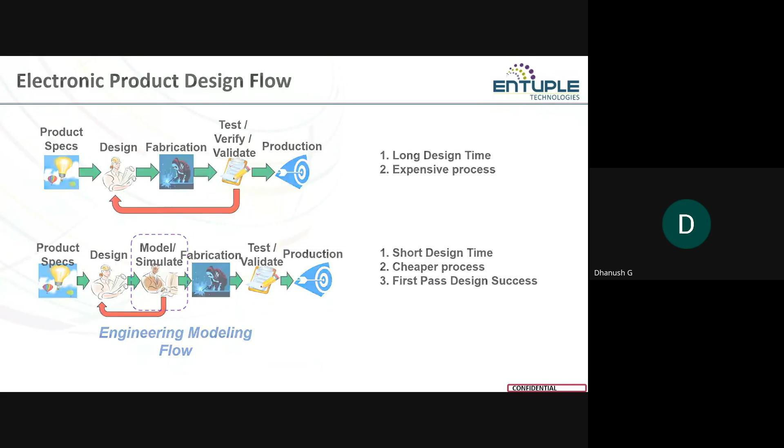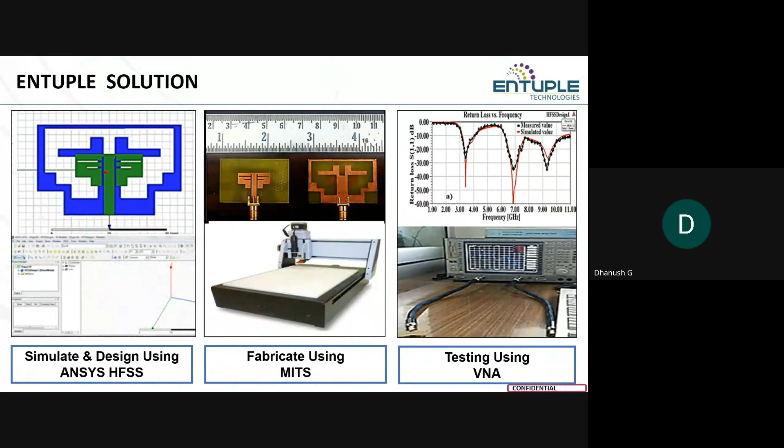Next, this is the ANSYS academic bundle, HF bundle. What are the products available in it, and what are the uses of this? Coming to HFSS, HFSS is nothing but High Frequency Structure Simulator. It's for high frequency electromagnetic simulations, to do a 3D electromagnetic simulation; it's only for high frequency. Next, we have a low frequency application called Maxwell. This is only for low frequency simulations.

Next, we have SIwave. SIwave is nothing but power integrity and signal integrity tools. There we can do power integrity and signal integrity on PCBs. For that, we will be using this SIwave. Next, we have Icepak to do a thermal analysis in PCBs or IC packages or electronic assemblies. When we need to do a thermal analysis, we can use this Icepak.

Next, we have Q3D Extractor. There you can extract RLC values from the PCBs. For those extractions, we'll be using this Q3D Extractor. Next, we have Motor-CAD. That's only for motor simulations. There are so many motor formats available in Motor-CAD. There you can design any BLDC motors and you can check how the windings will be working. For those simulations, you can use this Motor-CAD tool.

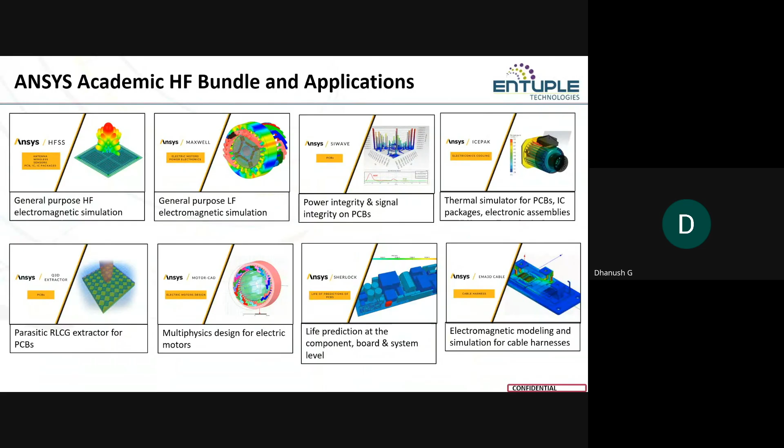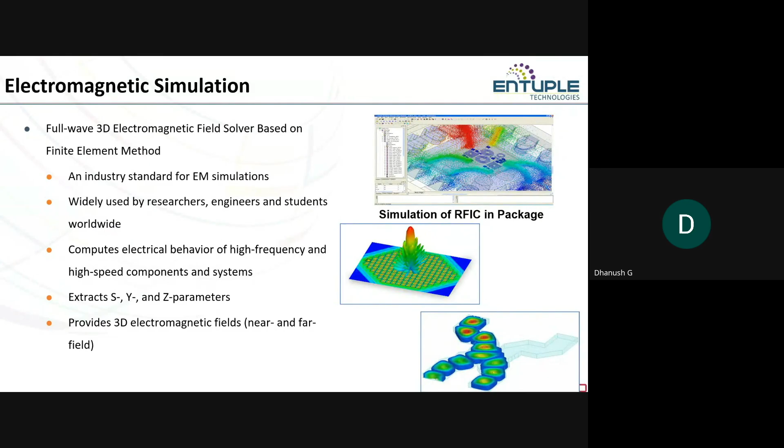Next, I'll be giving an overview of ANSYS HFSS, why we will be using HFSS and what solvers are available in it. HFSS is majorly used to do 3D electromagnetic simulations. It's based on the finite element method. In industry, we use it for EM simulations, and it helps build a bridge between industry and academia. In HFSS, we can extract S, Y, Z parameters, and more like VSWR, and we can extract electromagnetic fields for near field or far field.

These are the different solvers. What we are... any doubts? Okay. No, for sure. Okay.

Next, we have the IE solver, that is integral equation solver. It's based on MoM, method of moments, and its size is 100 lambda. We can use this for very large structures. It's completely frequency domain. We can use IE solvers in automotive industries, or for ships or aircraft to check RF cosite. It's based on MoM.

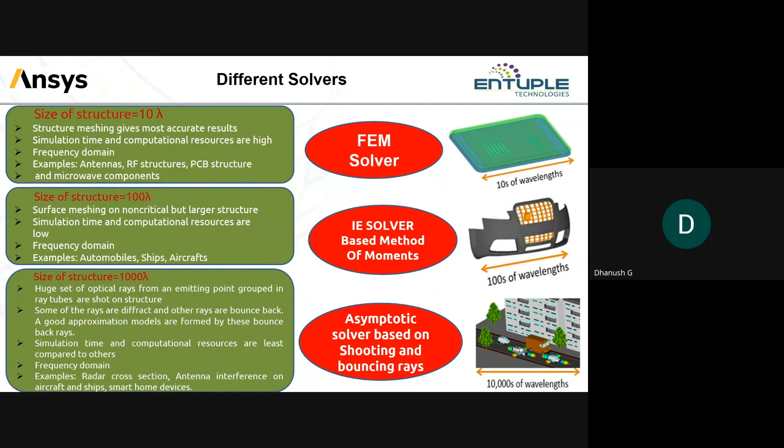Nowadays, ADAS vehicles also use shooting and bouncing rays to check how the antenna behaves inside a car or inside EV vehicles. Next, we have physical optics solvers. It's also frequency domain, and its size is 1000 to 10,000 lambda, because we are using very large structures. That's when you can use physical optics solvers.

Next, we have transient solvers. The transient solver is a time domain solver. If you are doing analysis of a lightning strike over an antenna, you can use transient solvers. You can also use transient solvers to check ESD, electrostatic discharges.

For that purpose, you can also use these transient solvers. These are the important solvers available in ANSYS HFSS.

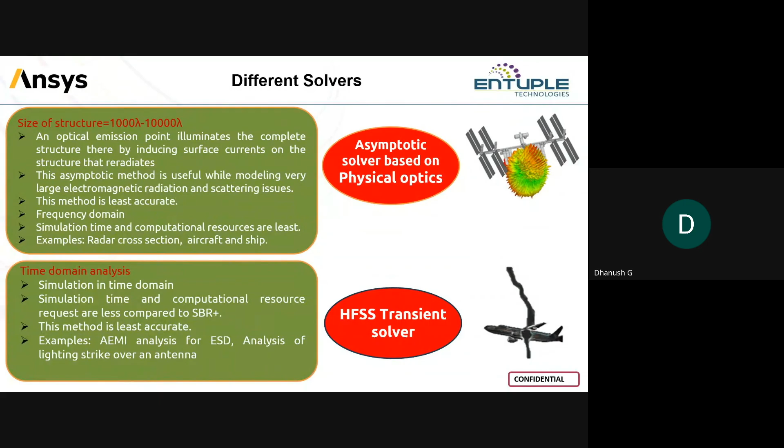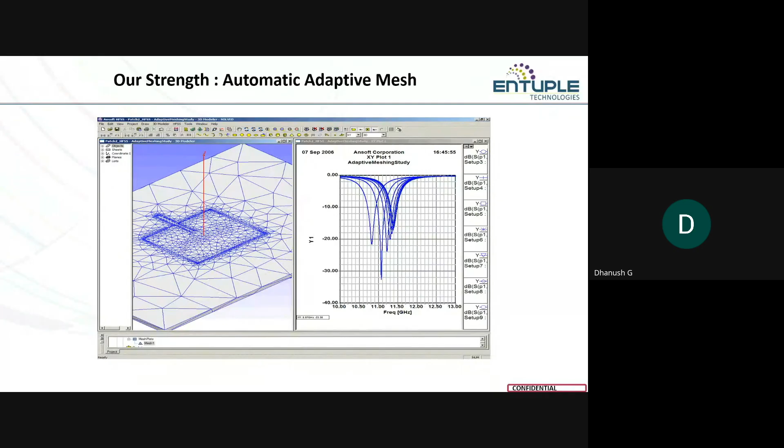Next, automatic adaptive meshing is our strength. Why? Because there's no need to mesh your structure manually. It automatically meshes your structure based on your operating frequency and lambda length, without affecting the fringing field. It subdivides the structure into small tetrahedral shapes to give the most accurate result, without affecting the fringing field.

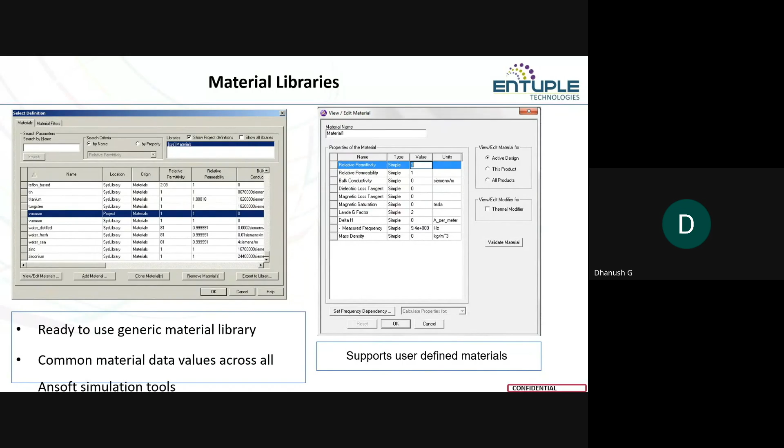Next, we have material libraries. In these libraries, we have so many materials, including FR4, vacuum, and air. All those materials are available. If you want, you can add your own material once you're comfortable with relative permittivity, permeability, bulk conductivity, or dielectric loss tangent. Once you're aware of all these components, you can create your own material and rename it. You can also do a thermal modifier for plasma simulations. For that purpose, you can use this material library and add your own library if it doesn't exist in the ANSYS library. This is the advantage of ANSYS HFSS.

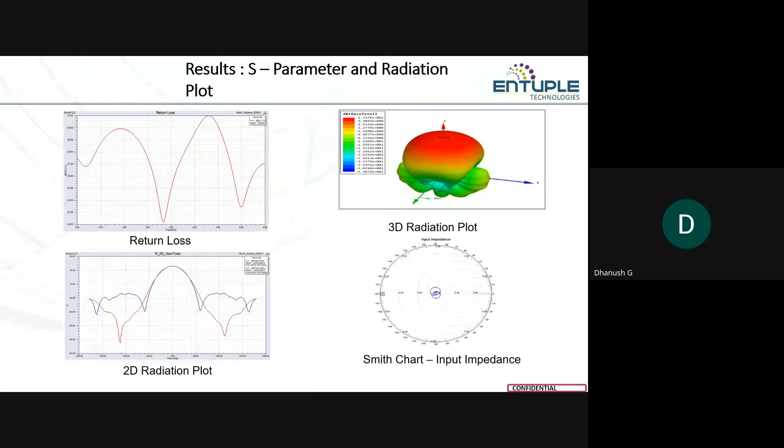In terms of S-parameters, these are the results we can extract in ANSYS HFSS. We can extract the S-parameter, which is nothing but return loss, and we can extract 3D radiation plots, 2D radiation plots, and Smith charts. You can do an equivalent circuit using the Smith chart. I'll be showcasing in the next slides how we can create an equivalent circuit using the Smith chart. These are the results we can extract, but these are the main ones we'll be concentrating on.

Next, there is an antenna toolkit available in ANSYS. In this toolkit, there are so many inbuilt examples. Using these examples, you can change the operating frequency and the outer boundary, and it automatically creates the structure based on your operating frequency. So you can save your time in designing step by step. You just enter the operating frequency and the radiation boundary required.

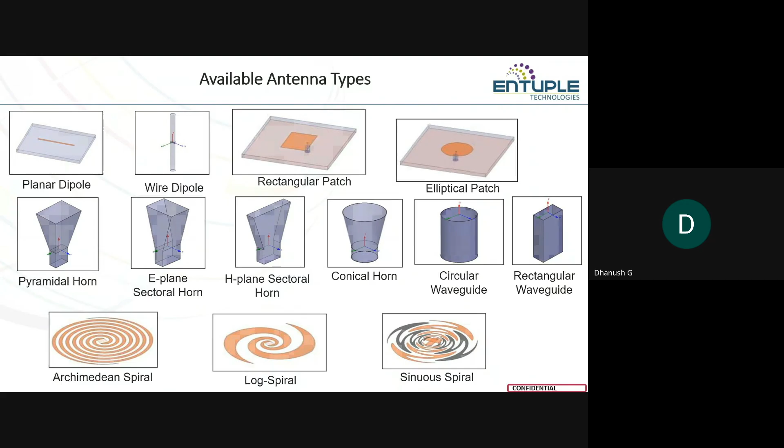Next, these are the available antenna types inside the toolkit. We have planar antennas, wire dipole antennas, E-plane and H-plane antennas, horn antennas - everything is available. We also have bow tie antennas, log periodic antennas, and PIFA antennas, and many more antennas inbuilt here. You can just enter the operating frequency and utilize this.

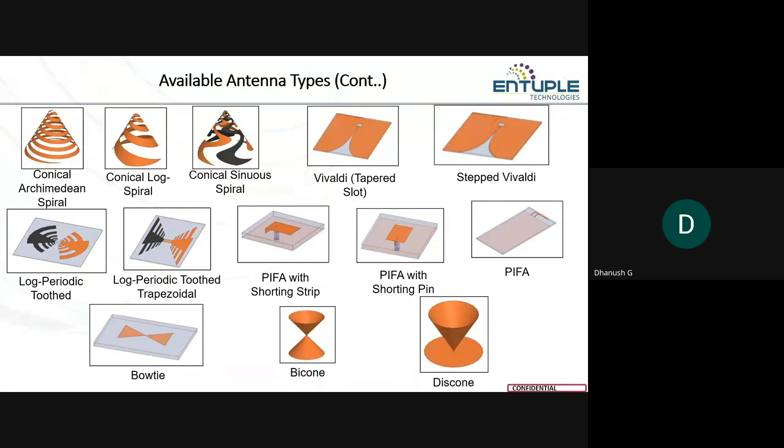For doing antenna simulations, you can use this. For antenna array simulations, you can use the HFSS surfaces to do 4 by 4 arrays, 16 by 16, or 32 by 32 arrays, or a unit cell approach using periodic boundaries. For those simulations, you can use these surfaces.

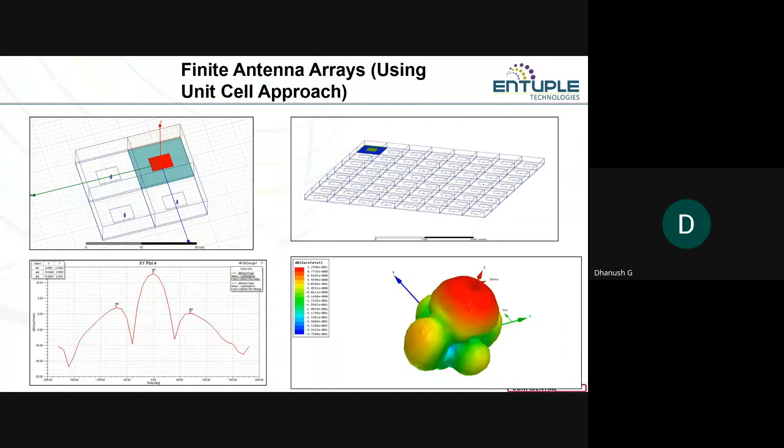Next, coming to ANSYS Maxwell, there you can do low frequency simulations. You can solve both frequency domain and time domain for low frequency applications, to design motors or transformers. For those things, you can use ANSYS Maxwell.

These are Maxwell's applications - what you can do using Maxwell. You can do BMS battery management system design software, use it for power electronics, and wireless charging simulations - this is a wireless charging simulation. For those simulations also, you can use ANSYS Maxwell, as well as for rotating machinery optimization. All those things you can do in ANSYS Maxwell.

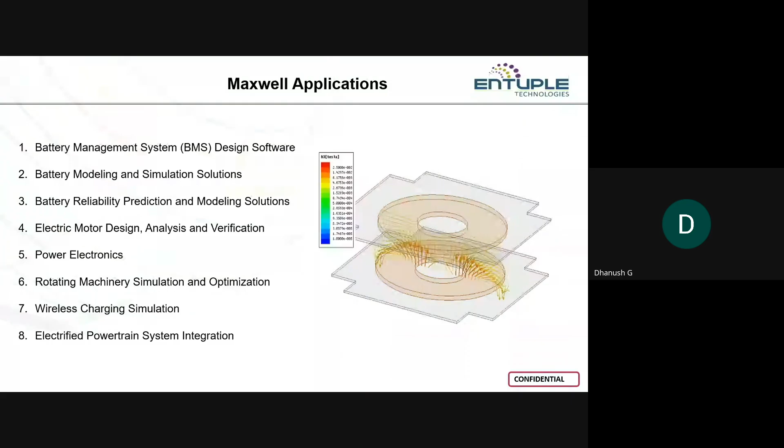Next, we have ANSYS Designer. There you can do circuit simulations, system simulators, Smith tool, and estimation tools. In this circuit simulator, you can do DC analysis, transient analysis, harmonic balance, and small signal analysis. Coming to system simulators, you can do frequency domain and time domain analysis. Next, coming to planar EM, there you can do interactive MOM solvers and see how it works with parametric capabilities.

Next, coming to Smith tool. In this Smith tool, you can create equivalent circuits. For example, you can carry your antenna and add resistors or diodes to it. Then you can take it to the Smith tool and get results, and using that Smith tool, you can create equivalent circuits.

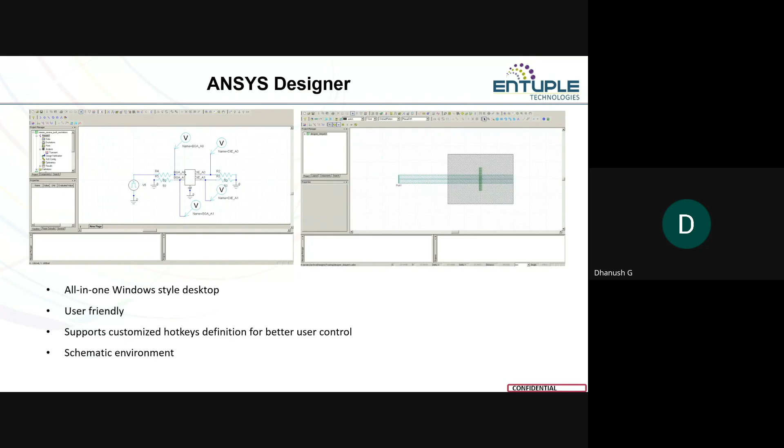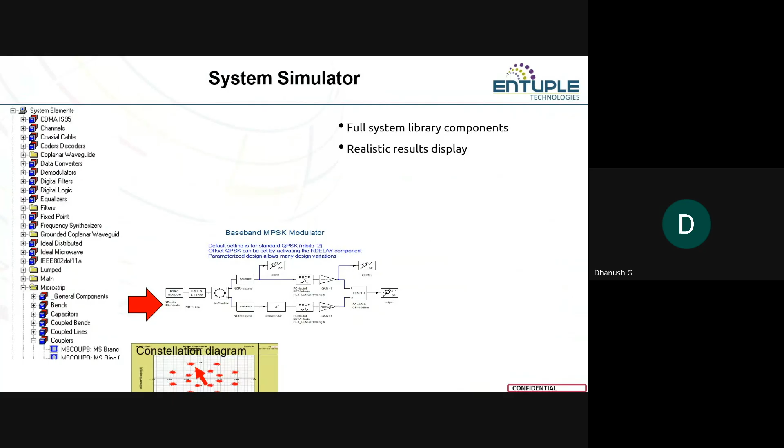This is the GUI of ANSYS Designer, an all-in-one Windows style desktop, and it's very user friendly. This is a circuit simulator. If you want any components like filters or coaxial cables, you can just drag and drop them to the workspace and see the components there. For that purpose, this is very user friendly. Coming to system simulators, these are the results you can extract, like constellation diagram, histogram, and transient plot. The eye diagram also you can see using the system simulator in the Designer part.

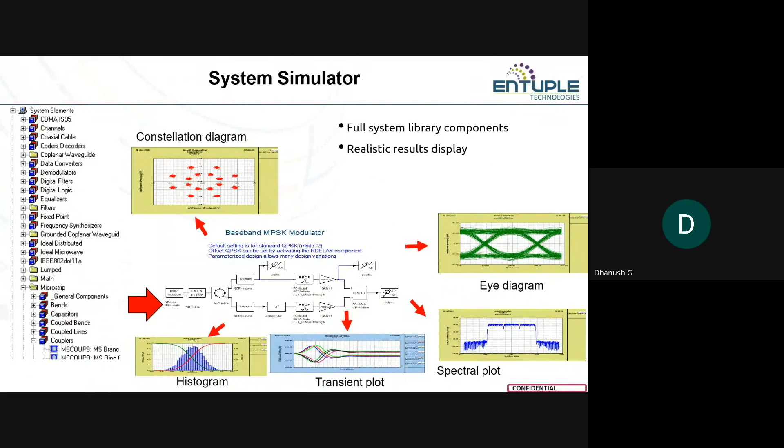Next, we have planar EM. In this, you can see all the results for your antenna structure.

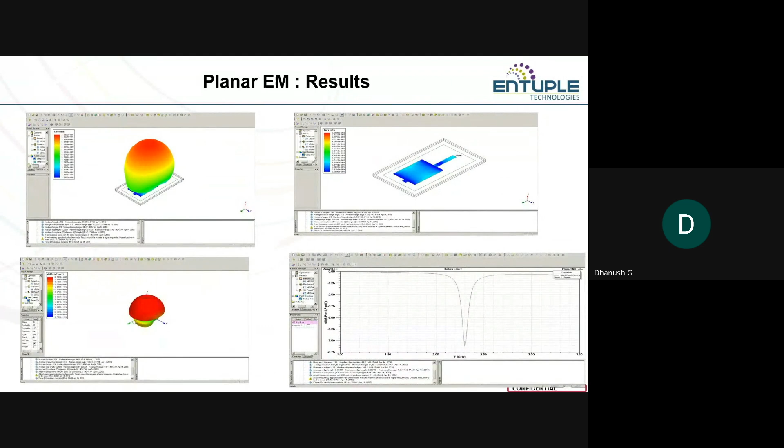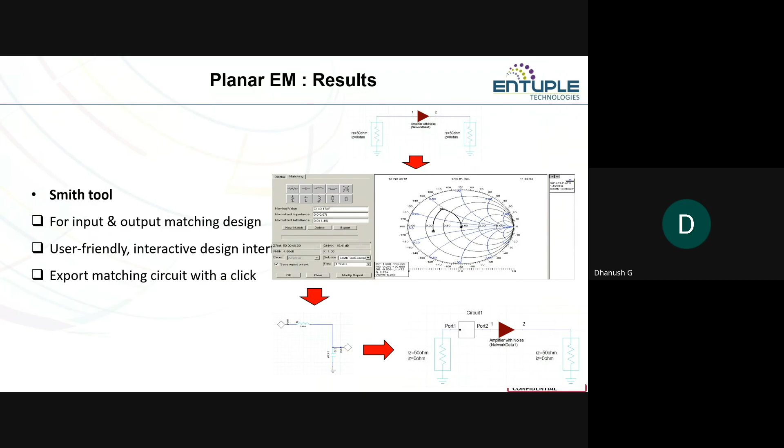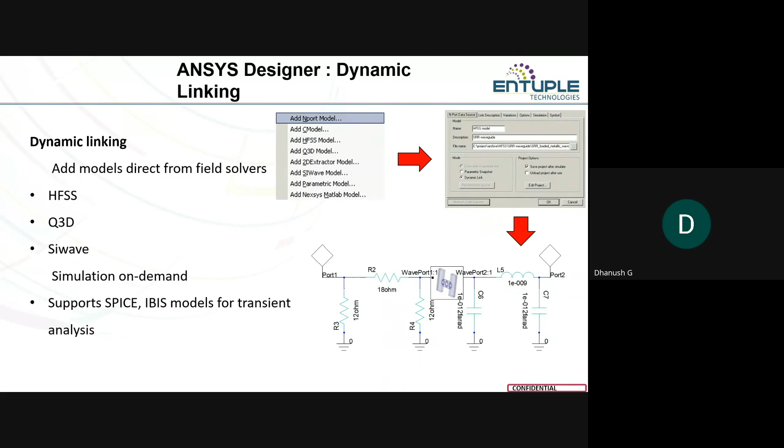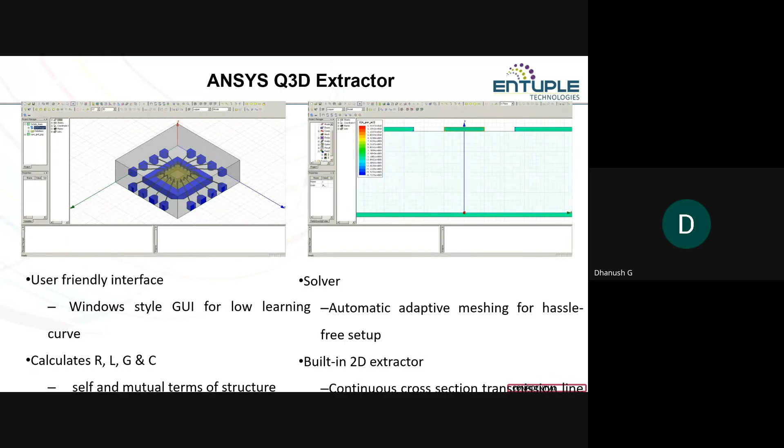Next, coming to Q3D extractor, there you can extract RLC circuits using a PCB structure, and it's a built-in 2D extractor. It's very user friendly there. For extracting purposes, you can use this Q3D extractor tool. These are the features of this Q3D extractor. You can have matrix results also displayed in it, and data table plots can be exported to any file formats, and you can export the entire circuit model for circuit analysis. These are the features of this Q3D extractor.

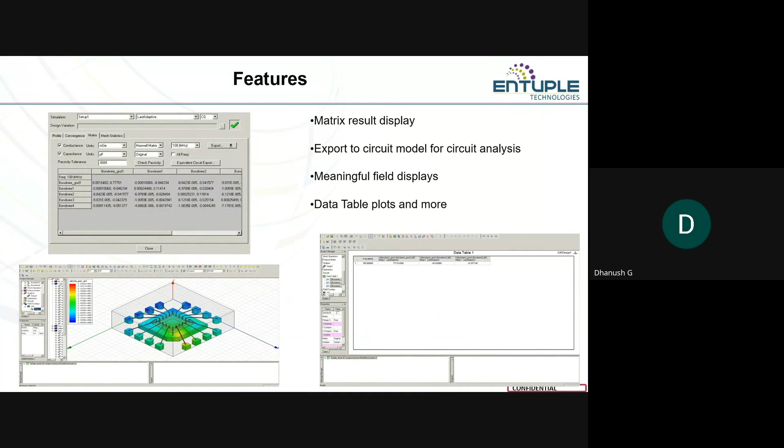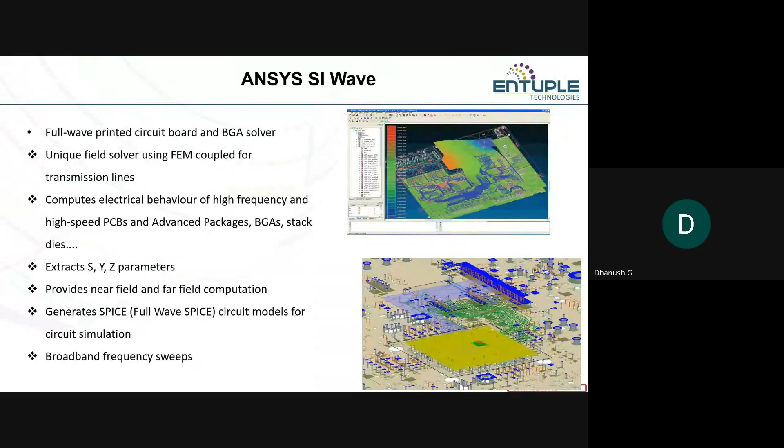Next, coming to ANSYS SIwave, it's a signal integrity tool. There also you can extract S-parameters. If you want to do PCB analysis or IC packaging, or generate SPICE designs and circuit models, and if you want to do broadband frequency sweeps, for that purpose you can use ANSYS SIwave to do FEM coupled analysis for transmission lines. All those things you can use this ANSYS SIwave for.

The applications where we can use this SIwave include PCB board modeling and simulation. For that purpose, we can use SIwave to check the reliability. And coming to electromagnetic interference and compatibility, that is a mandatory test for EV vehicles nowadays. For that purpose also you can use this, in EMI/EMC applications.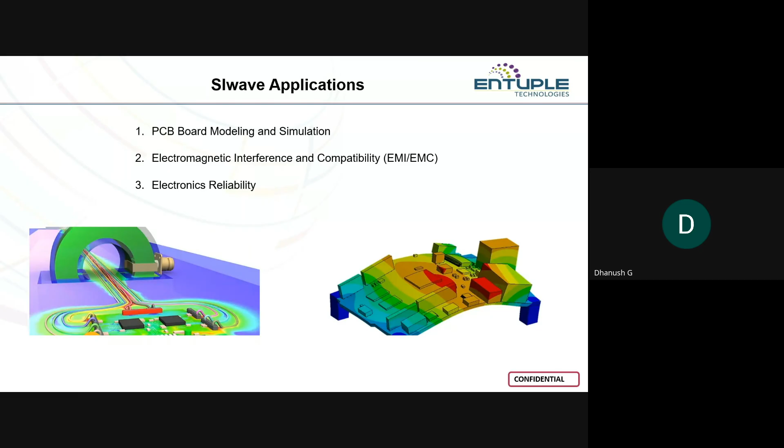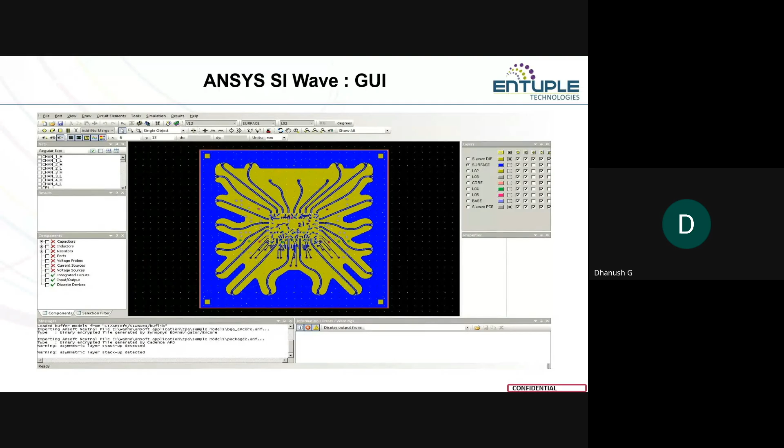Next, this is the GUI of ANSYS SIwave. There we have an electrical property calculator. You can calculate all the components like resistor or inductor properties. All those things you can calculate in a single click. So that's the advantage of ANSYS SIwave.

And this is all about ANSYS. We are there for accuracy, capacity, and speed.

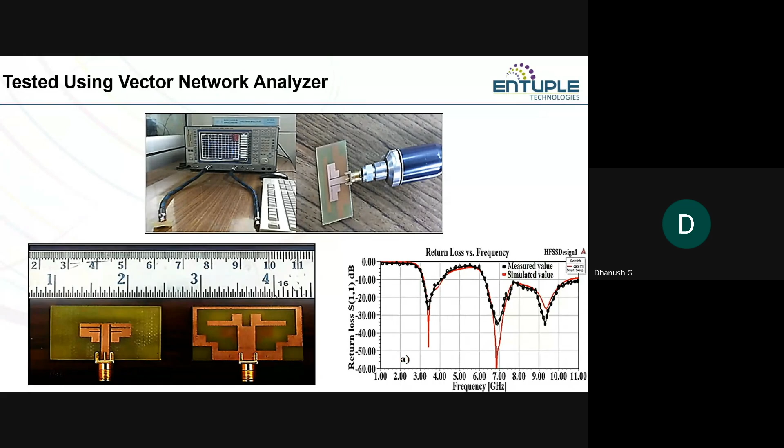If you have any doubts, please let me know here. Otherwise, I'll be going with the next part.

Sir, one question is there in the chat box: what is the cost of Auto Lab machines and MITS machines? Sir, I'll be giving my mail ID, sir. There we'll discuss one on one. I'll be putting my mail ID and contact number in the chat box, then we'll discuss one on one on the price and cost wise.

Sir, there is one more query in the chat box: what models are used in engineering modeling flows? Like what does model mean, can you brief about it, sir? Whether it's for turbulence model or CFD modeling, just give more introduction about it, then I can address it.

Before fabrication, in the block diagram... Sir, I didn't get your question, sir. Can you unmute and ask your question? Hello sir, am I audible? Yes sir, yes sir, yes sir.

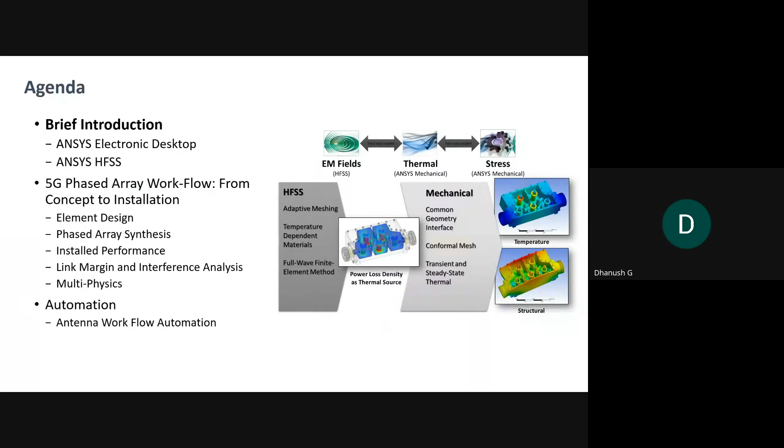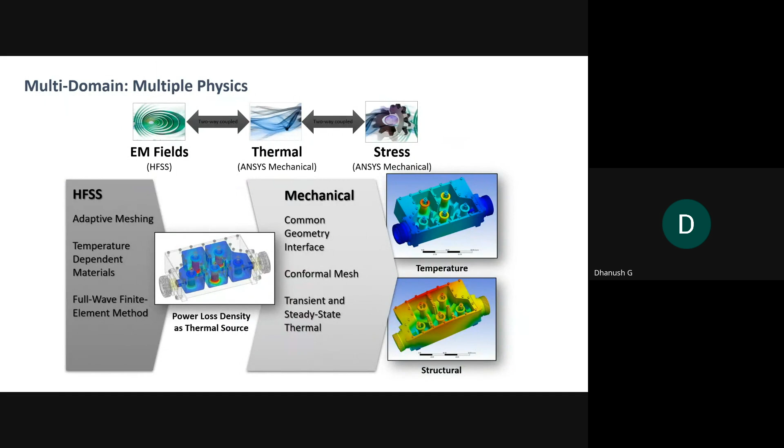In EM fields, we will be using ANSYS HFSS. In ANSYS HFSS, we do simulations with adaptive meshing and temperature-dependent materials. Coming to Mechanical, there you can do conformal mesh and use transient and steady-state thermal simulations. There you can check the heat transfer or the deformation. All those things you can check in the Mechanical tool.

Next, this is the GUI of ANSYS HFSS. In the next slides, I'll be explaining all these icons. And you can have it all in a single GUI in a single window. You can visualize all the capabilities in ANSYS Electronics Desktop.

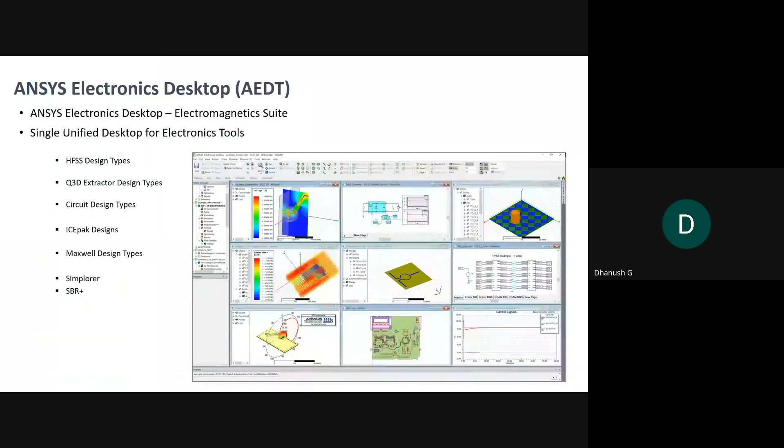Next, these are the steps of the electromagnetic simulation workflow in ANSYS HFSS. First, we'll be creating a model. In the model, we'll be creating structures like a microstrip patch or anything else. Next, coming to boundaries, there you can assign perfect electric boundaries or all those boundaries. Next, in the excitation part, you can give a port, or give a current for your antenna source.

And coming to mesh operation, it's default meshing automatically, but you can also mesh manually, that option is also available. Based on length, you can do meshing. Next, coming to analysis, you can assign operating frequencies and the sweep and maximum delta values. Next, coming to Optimetrics, there you can do optimization for your antenna, for specified frequencies or specified length and width.

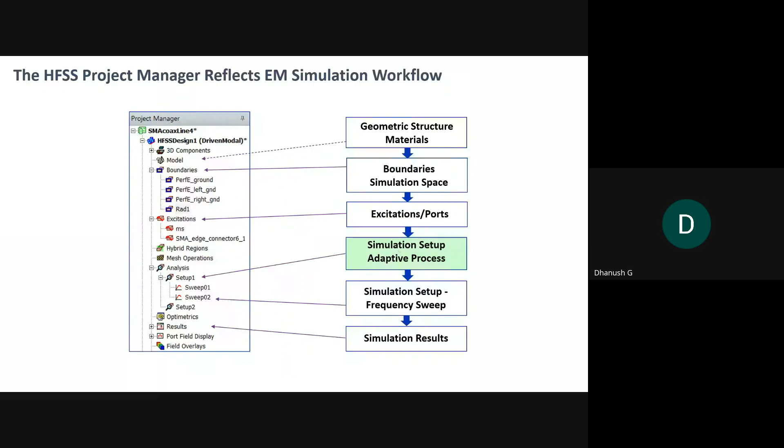Next, coming to results, that is post-processing. There you can see results like VSWR and all those things. Next, coming to field overlays, there you can check how the electromagnetic distribution happens for a structure, and you can visualize it animated.

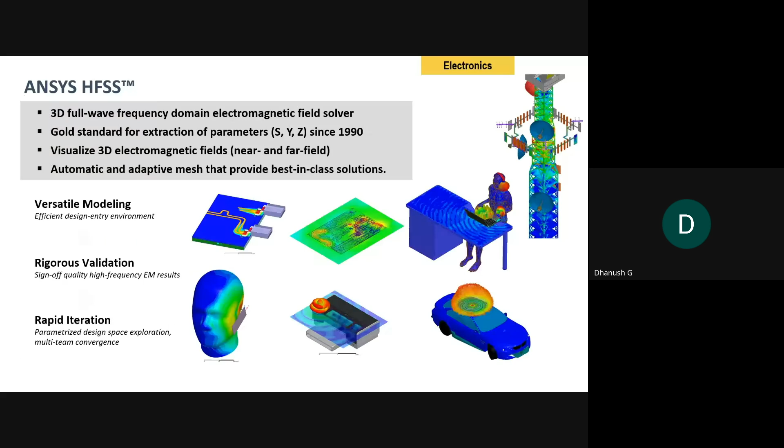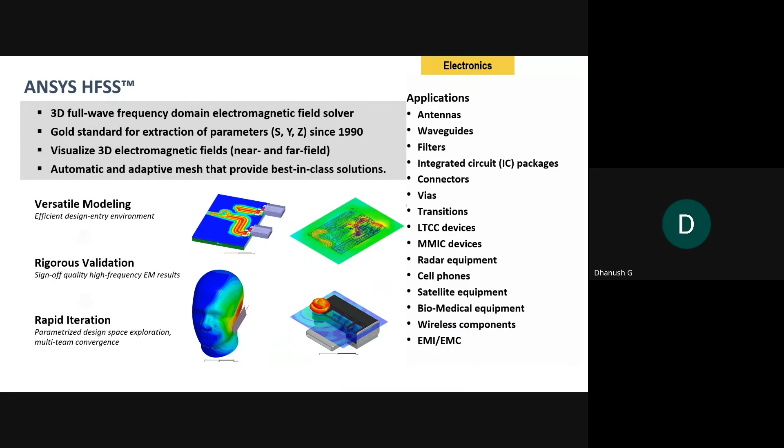These are the applications where we can use ANSYS HFSS. You can use this for antennas, waveguides, filters, vias, MMIC devices, cell phones, biomedical applications, or EMI/EMC applications using some set of standards. These are the applications we can design using ANSYS HFSS. You can do SAR rating also.

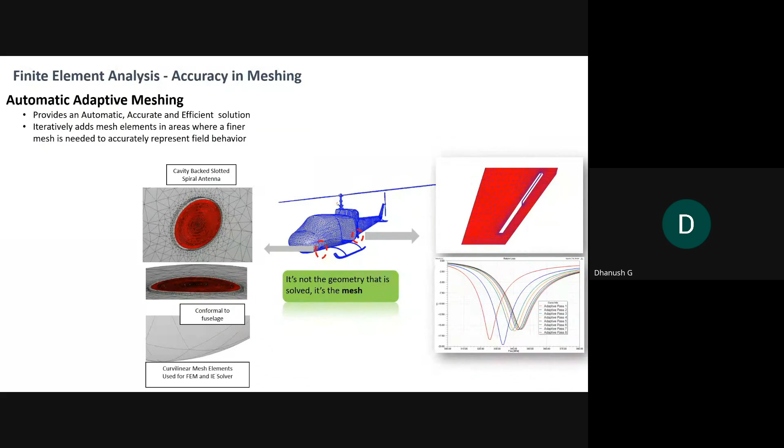For that purpose, automatic adaptive meshing is also important. There you can get accurate results. For that analysis, finite element analysis is used in the meshing part, and it will be divided into tetrahedral shapes. This is the adaptive meshing process, how the process is taken care of inside ANSYS HFSS.

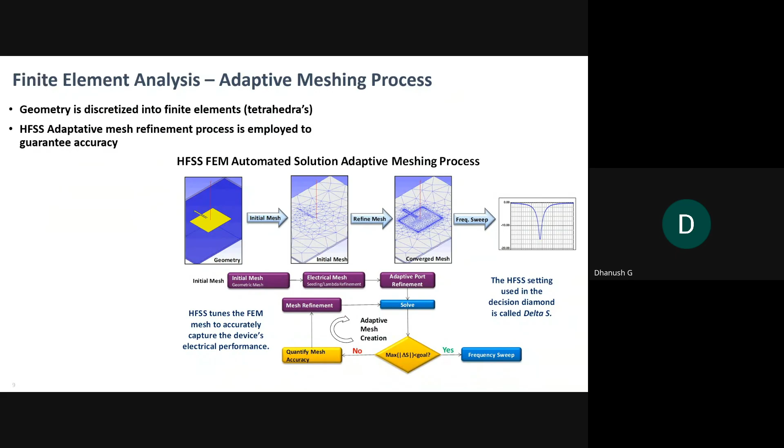First, we create a geometry. Next, it creates an initial mesh, refines the mesh, and converges the mesh. Next, it generates the frequency sweeps. If there is an error, it repeats the process, mesh refinement and solve, and edits the maximum delta values and frequency sweeps. These are the background processes in adaptive meshing using finite element analysis in ANSYS HFSS.

And next, I'll be showing concept to installation using ANSYS HFSS. In this, we are there for all major physics from chips to ships.

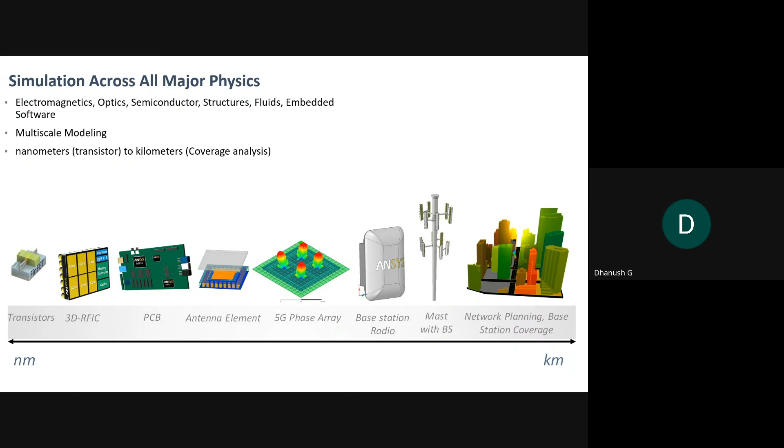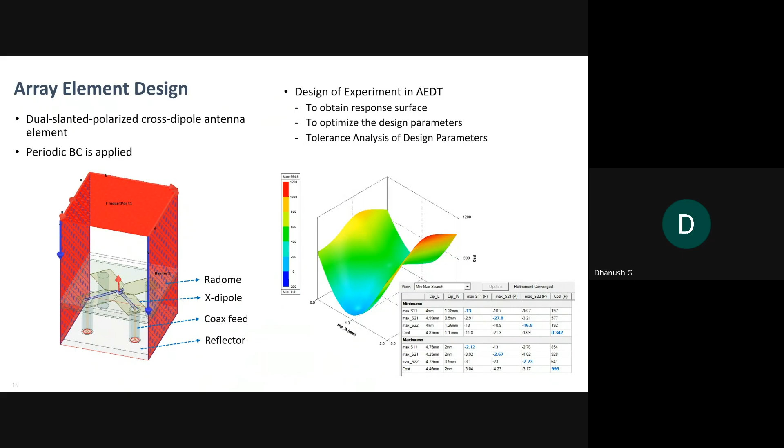These are array element designs. This is for dipole antennas. This is the antenna we are using for the creation of 5G phased arrays. For that purpose, we'll be using dipole antenna and cross dipole antenna elements. Periodic boundaries are applied for this, and we'll make this an array. These are the new features available in ANSYS HFSS to make this an 8 by 8 array for 5G at a 28 gigahertz operating frequency.

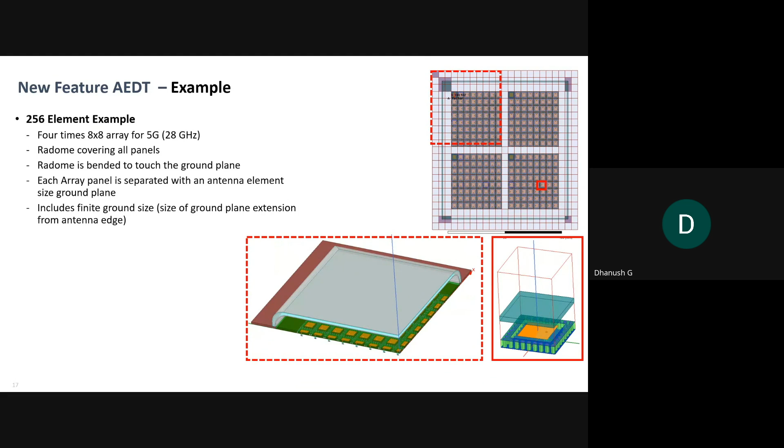Then, without housing, how it will radiate, all those things we can check using ANSYS HFSS. And after covering with a radome, how all the panels will be working, how the radiation will be split, all those things you can visualize using ANSYS HFSS. These are the new features available in ANSYS HFSS, how the simulations are taken care of and how much time a simulation will take.

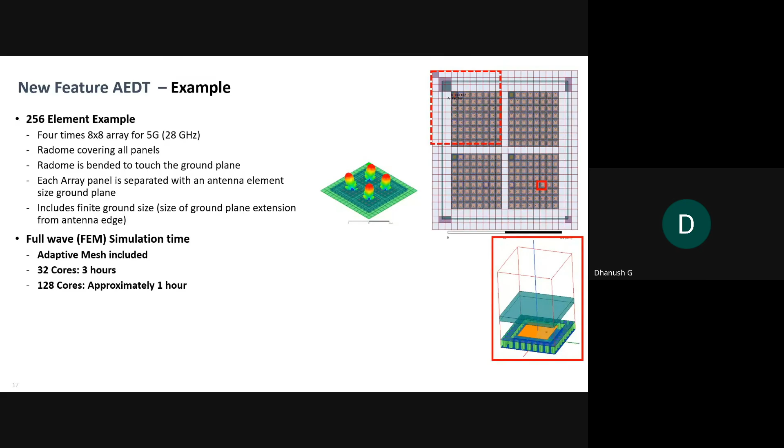With 32 cores, it will take approximately 3 hours to run all these simulations. For example, to install on the base station, how the radiation will happen, all those simulations you can do in 3 hours. And with 128 cores, it takes approximately 1 hour to do all those simulations. These cores are based on your system configuration.

Next, coming to antenna housing and installing the phased arrays including housing on the mast. For this process you can use all the available products in ANSYS Electronics Desktop. We can't design everything using ANSYS HFSS itself to create this entire area. We will be using the mechanical or structural tools to create all these building blocks or blockages, along with other ANSYS multiphysics tools. There you can create all those building blocks. We'll be placing an antenna, we'll be placing a mast. For those, you can use different physics tools.

Next, coming to hybrid solutions, where the finite element method is applied to antenna array structures, how the solution will combine both solvers in one design, and how it will solve the complex problem with fully coupled solutions. All those things you can do in this part.

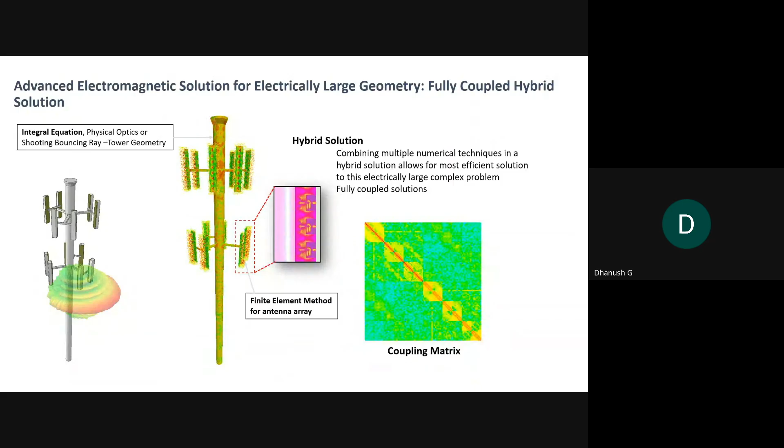Next, after installing the antennas in a mast, how the 5G base station radiation will be happening and how the 4G base station results will be. In the 5G base station, we receive fewer side lobes and more major lobes. Coming to the 4G base station, we are getting many more side lobes and far fewer major

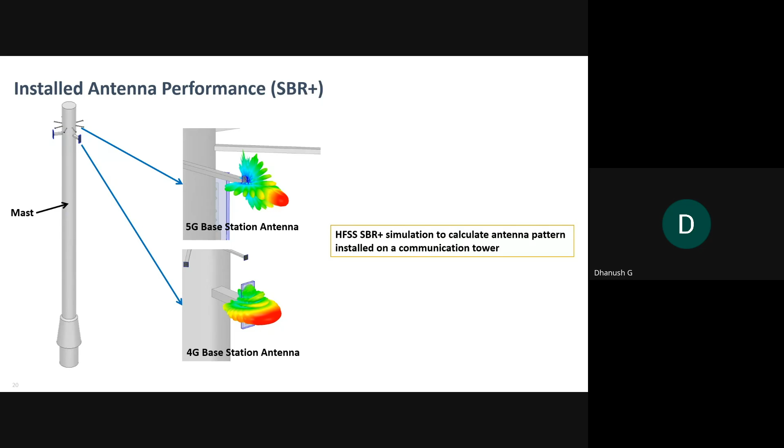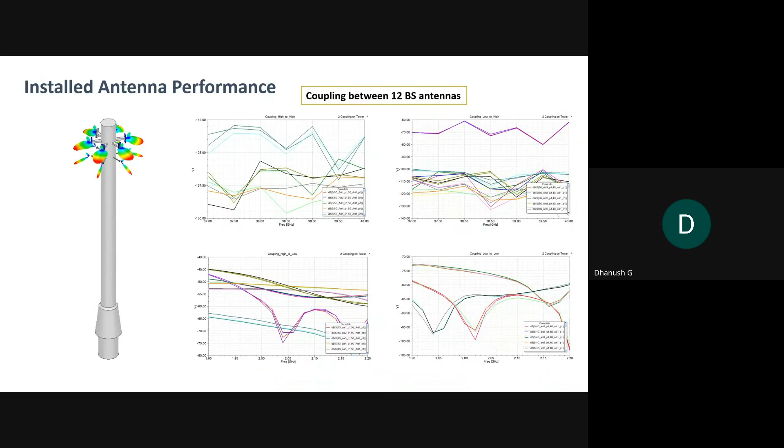lobes. With a 5G network, how the antennas will beam steer, how the antenna arrays will be, how the housing will be covering, all those things matter to get a proper, accurate radiation in a mast. And these are the results of after-installed performance in a mast, and how you can extract results from all antennas, how each particular antenna will be working. All those results you can extract after installing in the mast.

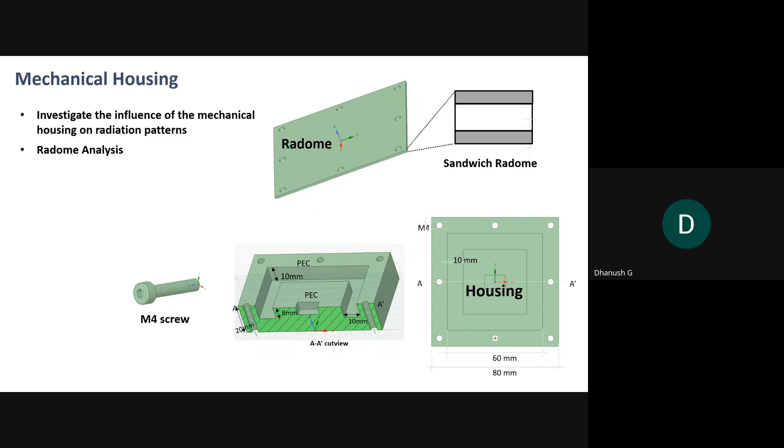Next, coming to mechanical housing, this is the housing we are using, how we created the housing, what are the screw length and weight. We have the entire specification to create this housing, and how the round corner radome will be affected and what results will change using those round corner radomes.

Next, how the edge effect matters for this housing part, how the smooth and the sharp edge will be affected. The black one indicates the smooth edge and the red one indicates the sharp edge. This also makes a big difference in the radiation patterns. Once we come to the housing or simulation part in hands-on, if it's possible, I'll be showcasing how it affects an antenna structure.

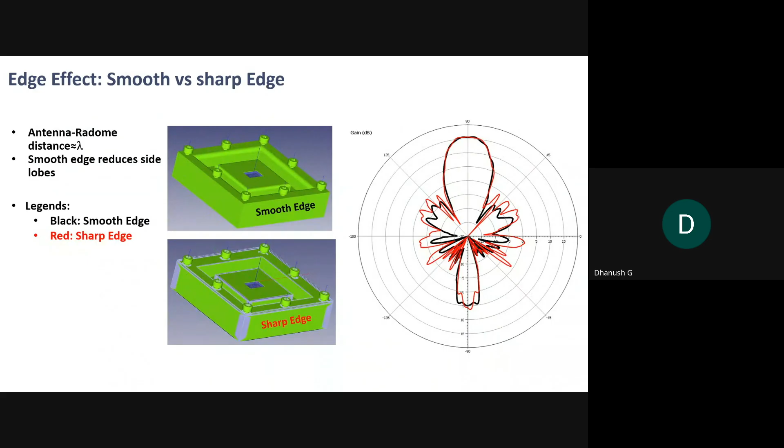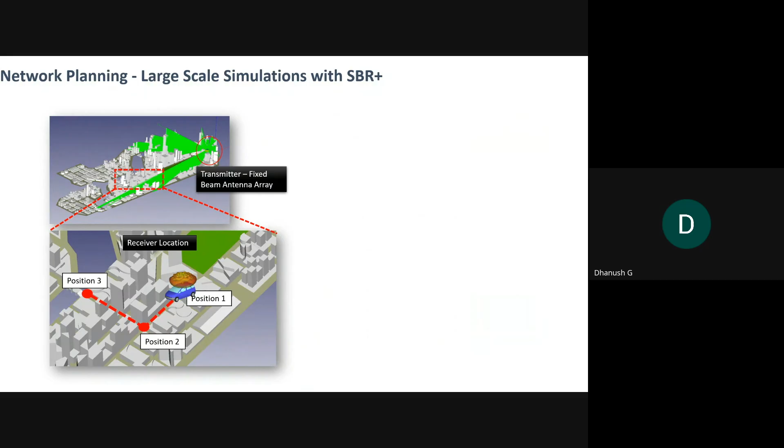Next, coming to network planning for user interfaces, how the handoff will take place and how the MIMO will be working there. All those things you can do in network planning and coverage studies. For example, if you want to see network planning at a large scale in simulation, you can use these SBR solvers. For example, a receiver will be traveling from position 1 to position 2 to position 3. We have a base station in a constant position. How the network will fluctuate and how we get network loss, all those simulations you can observe in these position 1 to position 3 results.

How the signal strength is reduced for a receiver traveling from different directions with more blockages, how the network drop will be happening, all those simulations you can do in HFSS with the support of SBR solvers. How the antenna fixture will be there, all those things you can visualize in ANSYS HFSS using these SBR solvers.

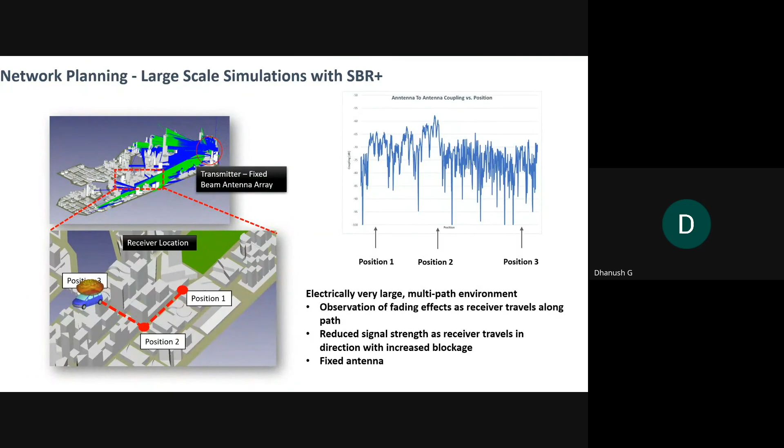How the base station handoff will be taken care of, meaning, for example, a device travels along a street in an urban environment from base station 1 to base station 2. The coverage zones for the two base stations, how the handoff will be taken care of from base station 1 to base station 2, how the site elevation will be taken care of, and how the base station to base station interface will happen. Using these SBR solvers, you can visualize this in ANSYS HFSS.

The device will be traveling in this urban environment near base station 1 and base station 2, the user traveling from base station 2 to base station 1, and how the handoff will be taken care of. For example, this indicates the user interface. The user will be traveling from base station 2 to base station 1, and how the handoff will be taken care of.

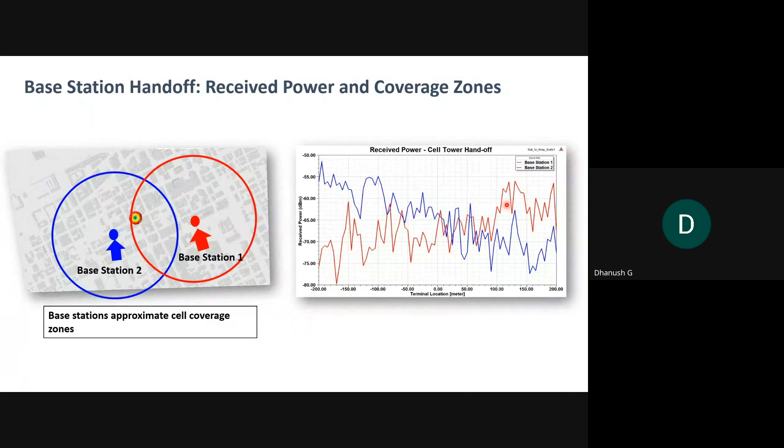Next, how the link margin, interference and coupling models will be taken care of.

And how the beam forming will take place, and how the beam steering will be taken care of. Using this, we will be using these RF system definitions to create RF circuits for this simulation using network blocks or building blocks. For those things, we can use these RF system definitions.

And how this link margin versus distance will be taken care of with interference and without interference: the link margin and distance graph you can visualize with interference and without interference, and how the results will be affected. This I'll be showcasing in the hands-on. Once I showcase the antenna design structures, I'll be showcasing these link margin results and how they will be affected.

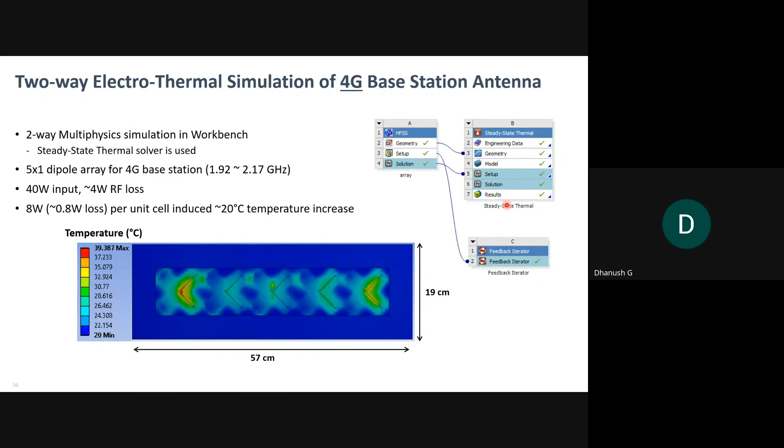Next, we have two-way electromagnetic thermal simulation for 4G base station arrays. How the two-way coupling will be taken care of, all those things you can visualize in ANSYS HFSS with support of steady-state thermal in ANSYS Mechanical tools. And how the RF loss will be taken care of. This is for a 4G base station. For example, for a 40 watt input, you can get 4 watt RF losses based on your input power.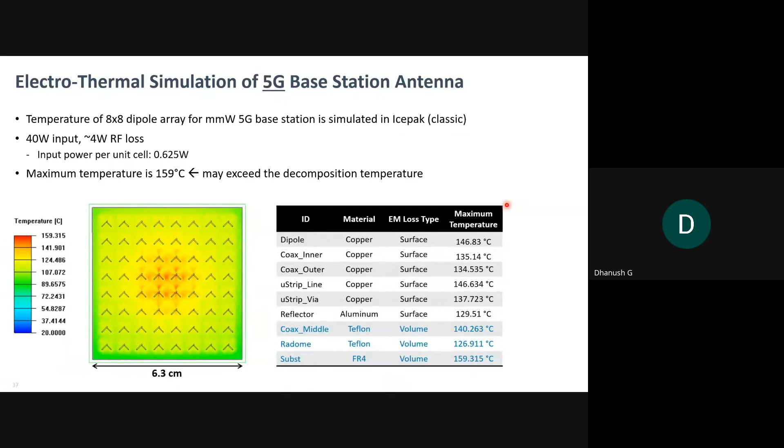And you can do thermal management in Icepak. There, to reduce the overall temperature, you can add a fan on the bottom. After installing the fan, using ANSYS Icepak simulations, the temperature will decrease to approximately 68 degrees Celsius. Those simulations you can also do using ANSYS Icepak. Once you are more comfortable with ANSYS HFSS, you can explore ANSYS Icepak to do this thermal analysis.

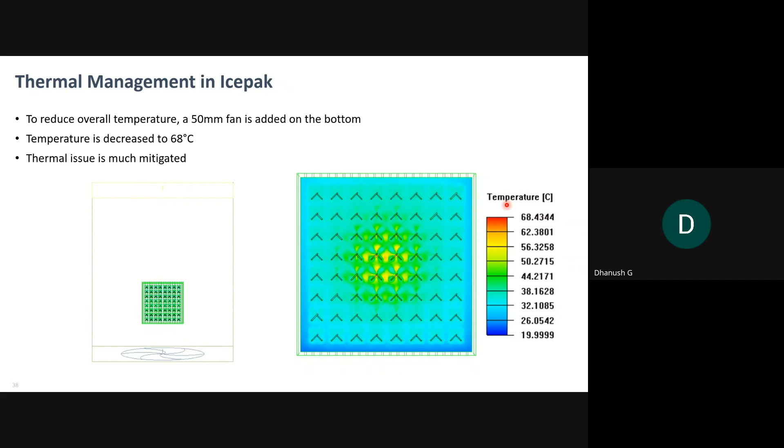Next, how the antenna performance will be after thermal loading. You can see the major changes before thermal loading and after thermal loading. This will be the impact of two-way coupling.

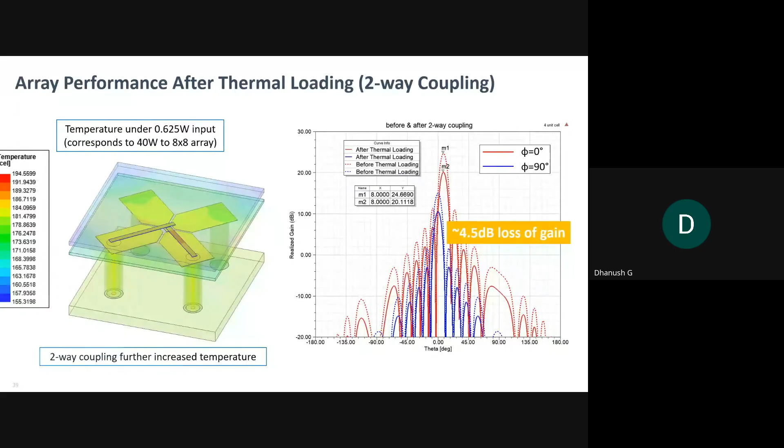Next, these are link margin simulations after a multiphysics simulation: without interference before thermal loading, or with interference before thermal loading. All those things you can visualize using ANSYS HFSS. You can recalculate the results using ANSYS EMIT simulations.

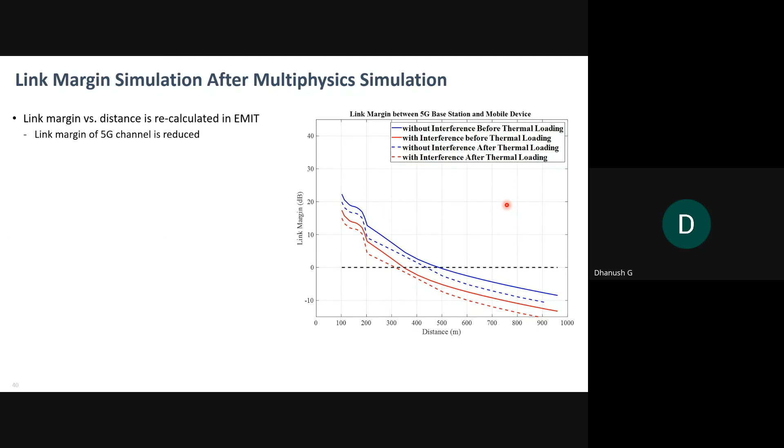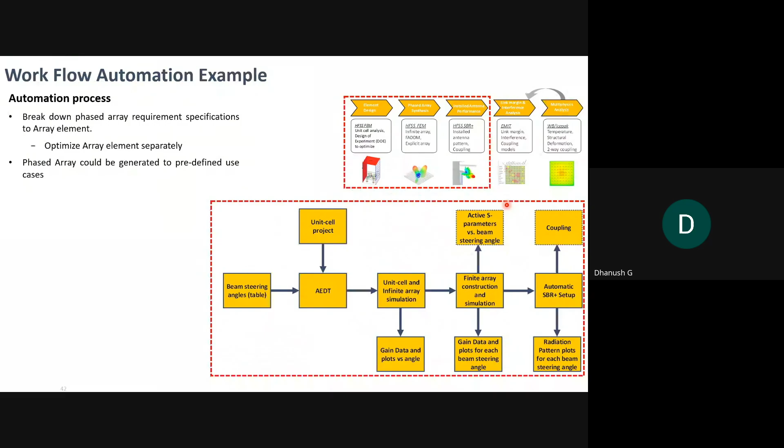There we have an option to create Python code for creating structures. We have modules for PyAnsys also. There you can enter your code, and it automatically creates the entire structure based on your code. That option is also integrated. Then you can record the response also. That option is also available in ANSYS HFSS.

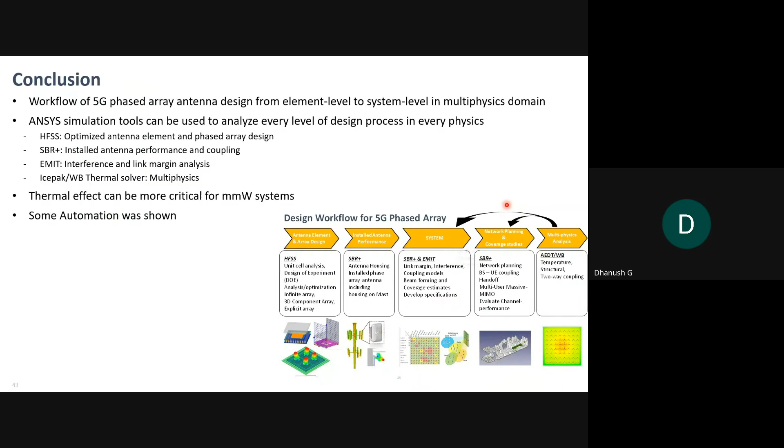Hello, sir. Yes, ma'am. There is a question in the chat box. Okay. What is the concept of radome, sir? Whether it is related to the array?

Yes, it is related to an array; it means a cover for an antenna structure. For example, you can see the base station in the outskirts, right? You will see the base station, right? It will be covered with a structure. That structure we call a radome.